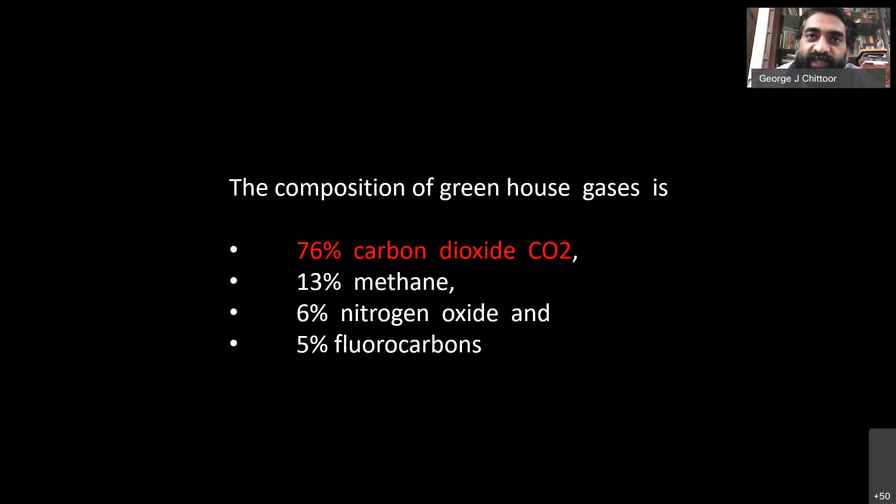We need to know that 76% is carbon dioxide, and researchers show that 8 major sectors contribute to the production of carbon dioxide: power stations, industry processing, transportation fuels, agriculture byproducts, fossil fuels, commercial and other sectors, land use and biomass burning, and waste disposal and treatment. Of these, industry processing is what the building industry uses more, and 80% of industry processing emissions are contributed by the building industry.

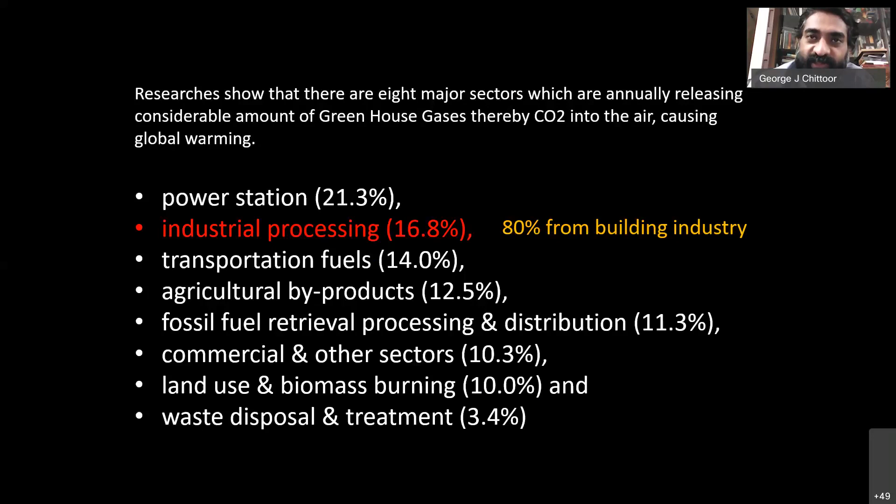So these are certain terms associated with sustainability that often surface when you speak about it. It means your aim is to have less embodied carbon. What is embodied carbon? Embodied carbon is the carbon footprint of a material during production—how much carbon it has emitted during production. That is the measurement we take when saying embodied carbon.

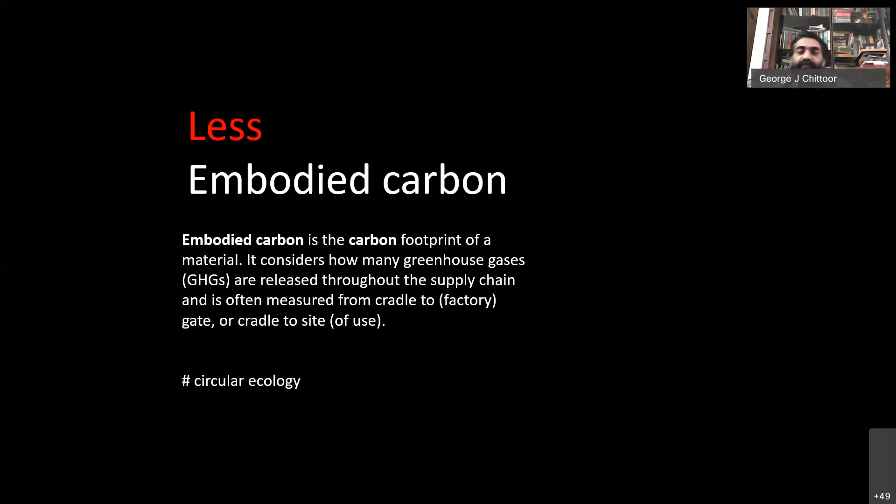The other term is embodied energy, which is an easier term—it is the sum of energy required to produce all the goods and services. This is a kind of chart where you compute the embodied energy in any material. First, you take the raw material: how it is manufactured, how transportation is taken into account, where the raw material is mined, how it is brought to the industry, and what processes make it product-ready. That is how the energy is computed.

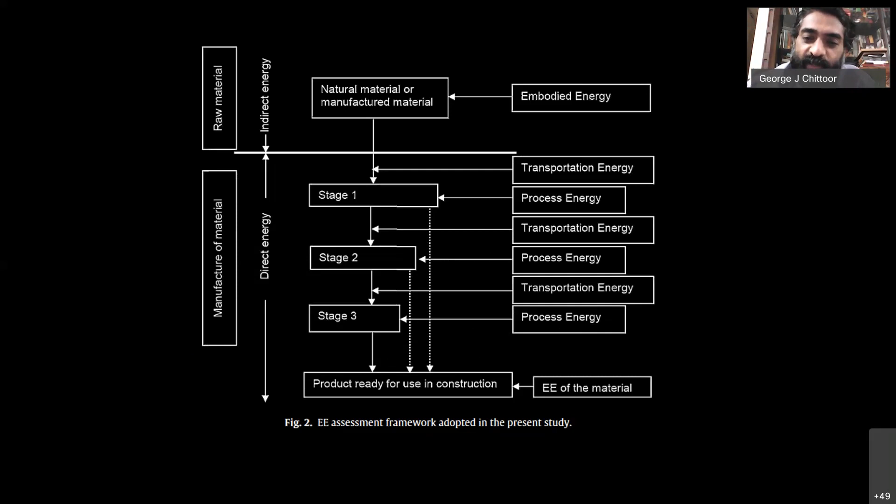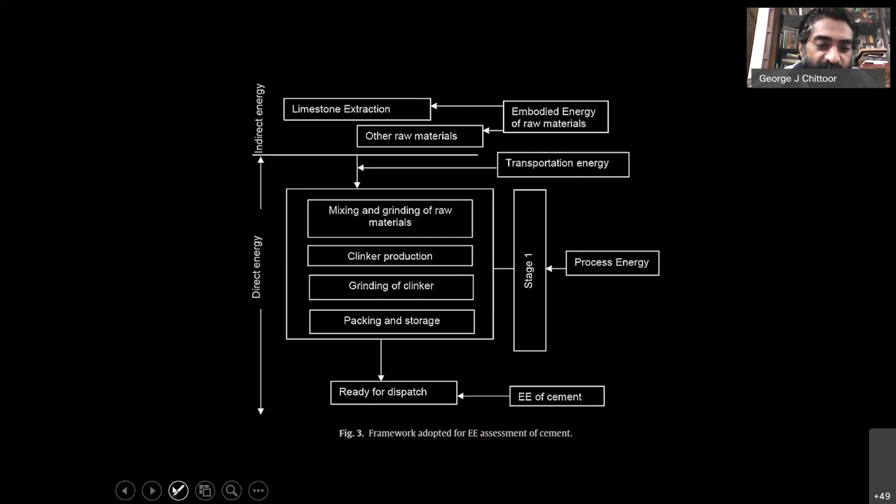In the case of cement, this is a trial chart where the limestone is extracted. The embodied energy needed for extraction, for transportation to the place where it will be mixed, clinker production, grinding, packaging and storage, and readying for dispatch—this entire process is how embodied energy is calculated.

These are some embodied energy standards found in the Indian engineering manual. They've practically identified most of the materials, but this is a general term—not conclusive or standard, because from place to place the embodied energy for brick production in Bangalore or Karnataka is not the same as in Kerala. Each context changes this calculation, but we can use this for general purposes of evaluating a construction technique.

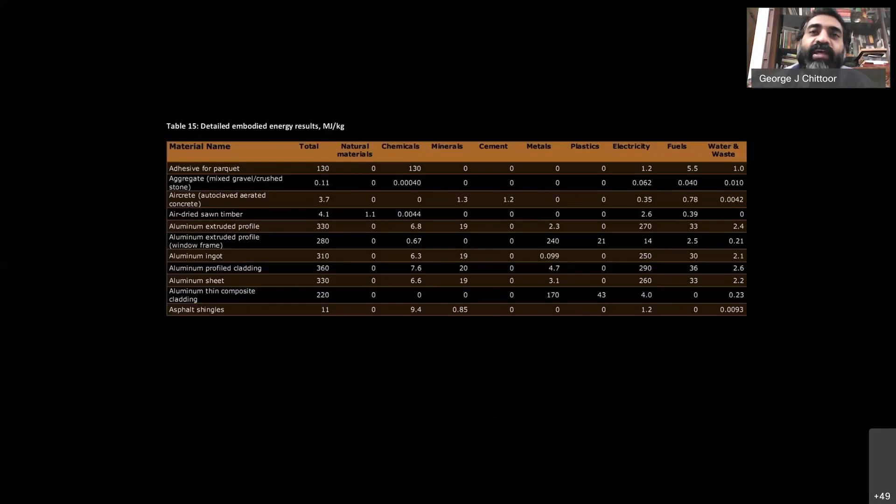So that was energy in the production of building materials. Now you need to think about less waste.

Every building has a life cycle assessment. Every building in its entirety takes up resources in the production to the end, while after a certain life period it needs to be demolished. So this life cycle assessment is an environmental impact computation, a measure of the environmental impact that a building takes up.

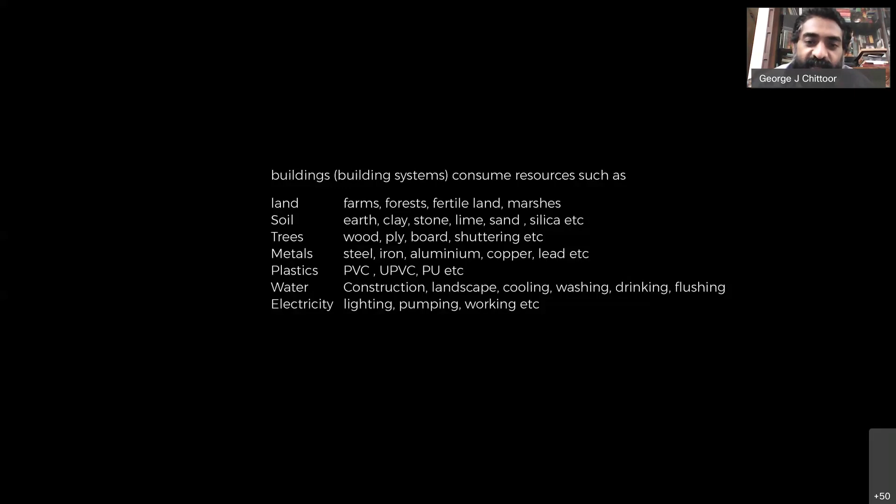Now buildings also generate waste. Site waste is something that occurs during site clearance, the initiating of the project, where trees are cut, vegetation removed, and soil excavated.

Then during the course of construction, there is waste generated - metal boxes, broken bricks, shuttering oils, etc. Sewage is produced during the operation of the building. Organic waste is generated during the life cycle of a project - vegetables, fruits, kitchen waste.

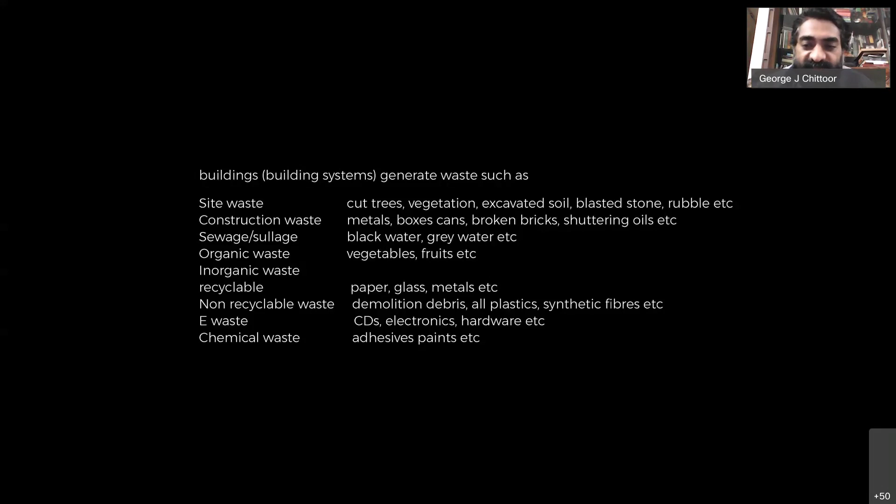There is inorganic waste which can be recyclable and non-recyclable. Recyclable contains paper, glass, metals. Non-recyclable includes demolition debris, plastics, synthetic fibers, etc. Then during the production period, there's e-waste - CDs, electronics, hardware - and chemical waste - adhesives, paints, etc. So these are the kinds of waste generated during the life cycle of a project.

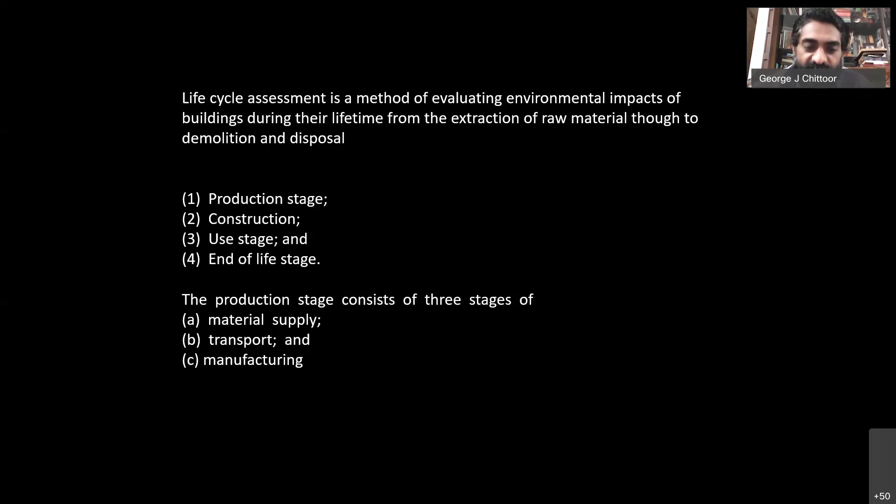So next, I'm just running through - this is the science part of the subject. Next I'll go through the general components in a building.

So the foundation - how can you be sustainable in foundation? Foundation is where we don't speak too much about sustainability because we need to be sure that our building is safe. So we don't generally compromise or experiment too much there, but we speak about sustainability when I have to decide between low-rise and high-rise buildings.

When somebody is deciding to construct and both options are workable for them, I generally advise going in for the low-rise high-density project. Why? Because it takes a lesser amount of steel and concrete to build up the foundations than a high-rise building. The same amount of square feet can be achieved with low-rise high-density. So we generally advise for a low-rise building because it consumes less materials. That is how we generally aim to be sustainable in the foundation part.

I've seen Laurie Baker try out with bamboo and such, but I'm not courageous or adventurous enough to try out those techniques because most of his knowledge came from empirical methods. Those were not standard, recommendable theory at that point in time. But he worked it out, and now there is a theory part of it - now there is an authentication.

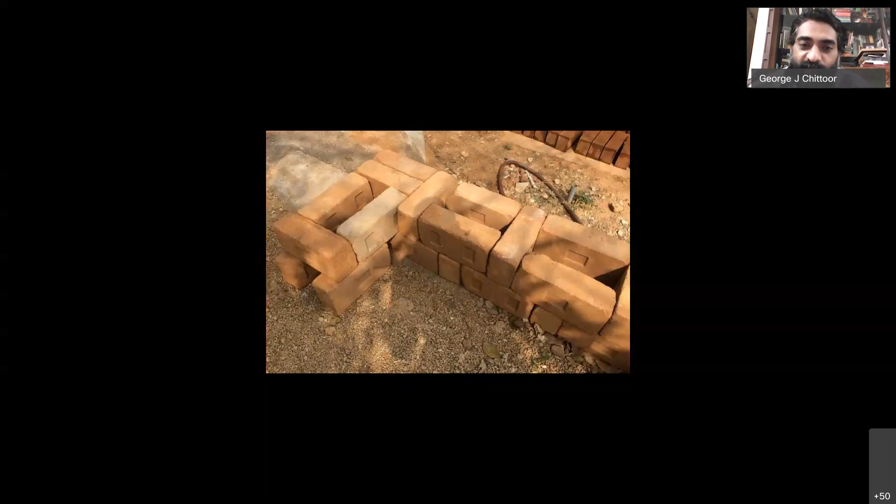So this is brick - there was the English bond, and Laurie Baker introduced the rat trap bond. He was not the person who invented it, but it was in general use in England. This is found to be thermally good and uses fewer bricks. The mortar joint compared to the normal English bond was also less, so thereby you're saving cost from both factors.

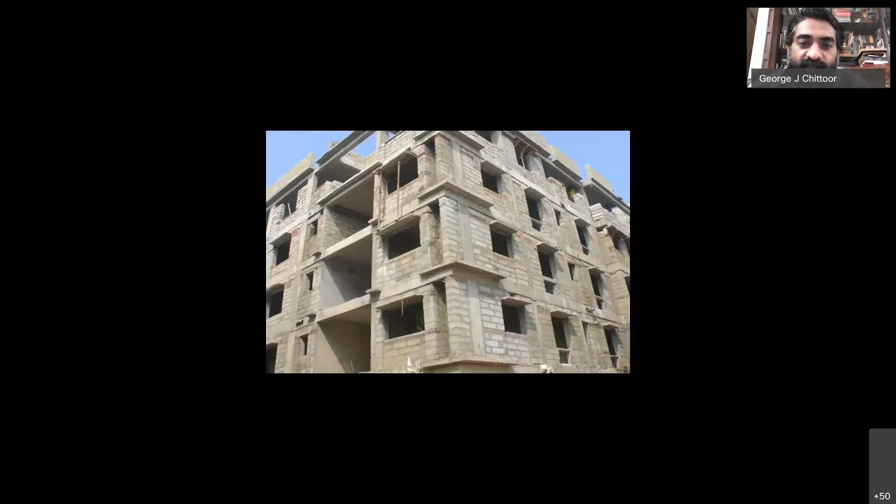Then we have the solid concrete block, the hollow concrete block, the aerated concrete block, the stabilized mud block, the Porotherm bricks, Wienerberger bricks. So all these are building materials for the walling systems.

There wasn't acceptability towards most of these materials. Brick was the known material for a traditional Malayali. I remember it was around 2010 that all these materials started becoming more common. We had difficulty during those periods convincing clients to use these and making it more economical. Now it is certainly the most economical material, but during the initial stages, in the 2010s, it wasn't easy convincing a client to use a concrete block.

At that point of time, brick was not readily available. It was getting costlier and costlier, but it was available. Even now, it is available at a higher cost.

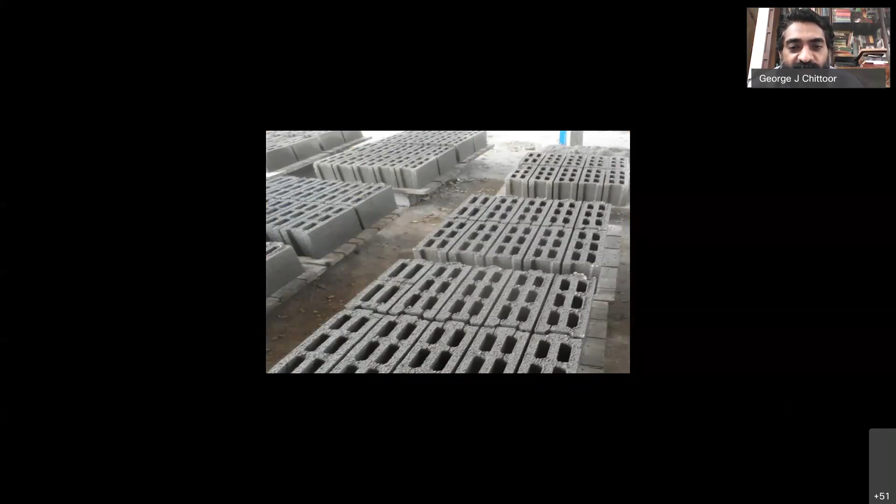Solid block, hollow block, aerated concrete block and stabilized mud are not load bearing. That is why we'll have to do a column frame structure to incorporate this material. But most apartments are now incorporating these materials.

I really like AAC blocks because they are very lightweight and can be constructed very fast. If you have a large area per floor, at least four layers of aerated block can be built up in a day for a wide area, compared to brick or any other material.

So these are places where project management plays a heavy role. In project management, you identify what is consuming more resources, in terms of material usage and in terms of time usage. So the easiest parameter to assess all these management techniques is to see whether it is costly or not, is to convert it into rupees, and you can see that when it is coming out more economical, it means it is consuming less energy.

It is not a conclusive theory, but it is a general theory which I always use. Because right now, concrete may be cheap, but later on, looking from the material resource point of view, it will get diminished. So we need to take care in the usage of material so that we are using it for the later purpose. From that point, we need to take care.

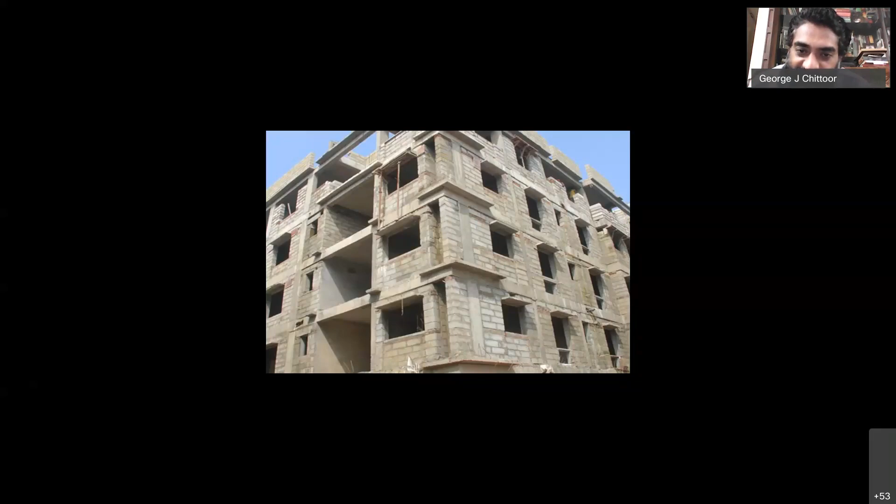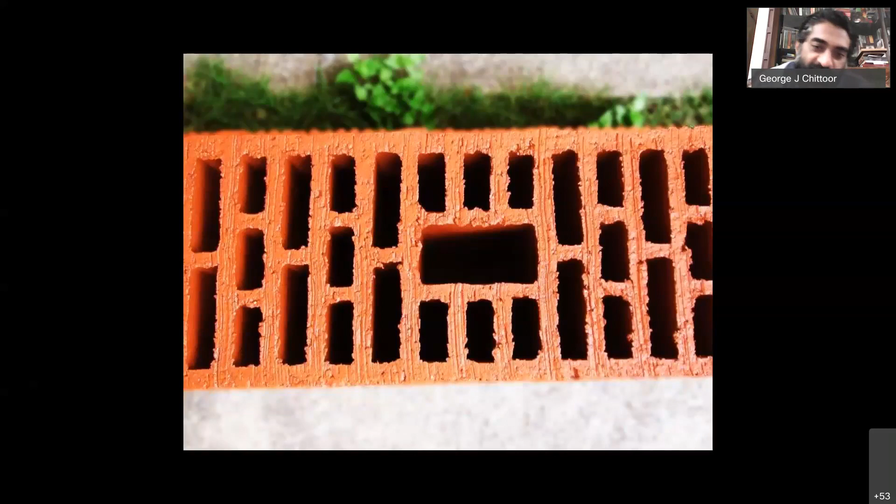This is Porotherm bricks. It is also widely used. We started using this. The good thing about this patented technology is it was started by a German Wienerberger company, and there are many companies coming up with similar materials from Bangalore and all. There are many companies producing these Porotherm bricks, but the technology with Wienerberger is that the fins in between are so thin, it seems they've got some kind of technology that produces thin clay layers in between.

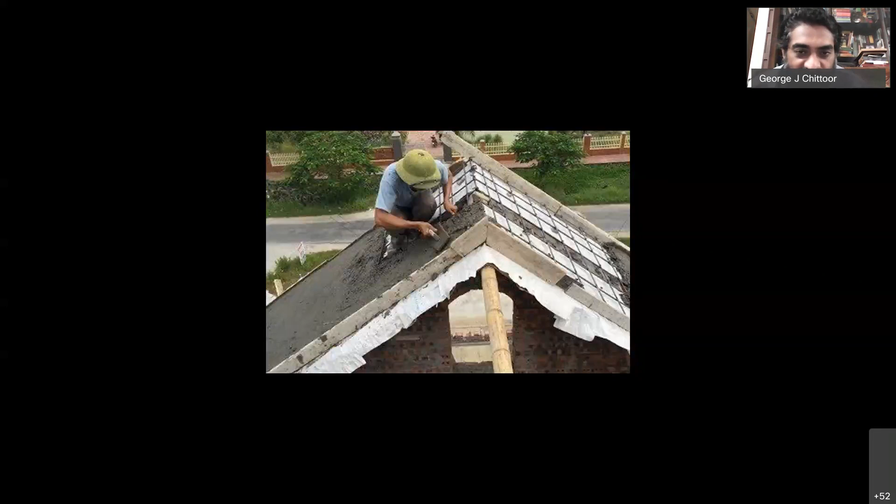So when it comes to roof systems, there is traditional concrete, then we have filler slabs with clay pots, and there are Mangalore tiles also being used. So these are now common technologies, but the usage requires skilled labor while doing all these technologies.

When it comes to normal concrete, it can be easily done, and if there is any flaw, it can be easily rectified. But when it comes to filler slabs and these alternate, unconventional methodologies, the one constraint is it cannot be rectified, and the usage of manpower is too high, which adds a lot of cost and time. So in terms of material resources, it is less consuming, but when it comes to labor, it is more consuming. That is why it is not popular.

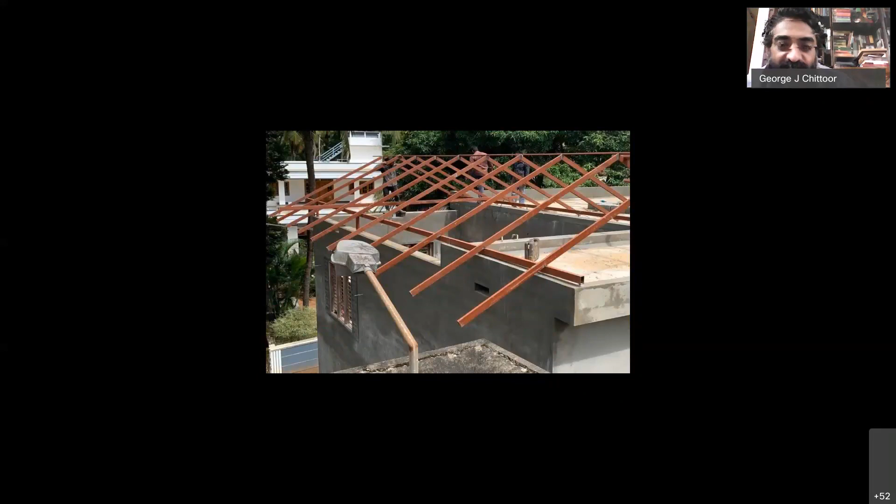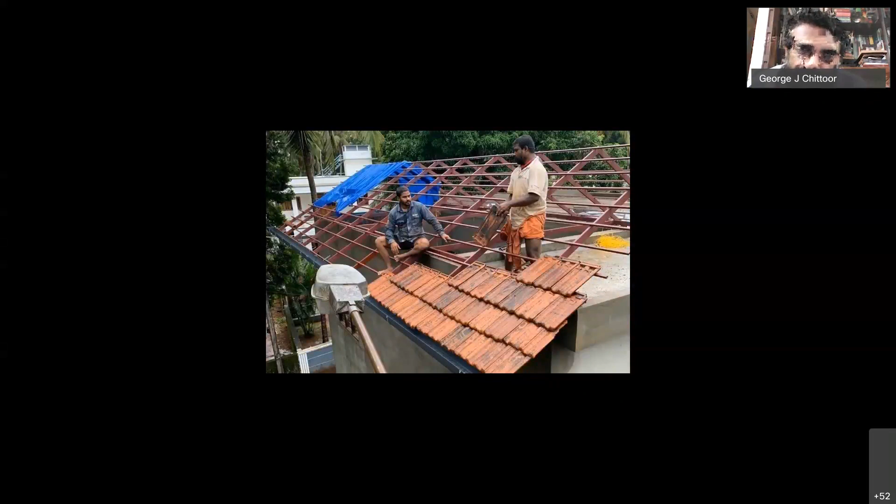And this is another variant which is being common nowadays. Instead of concreting, you do the truss work and then lay it with Mangalore tiles. On the underside, you use either PVC or there are many materials like cement fiber board or natural wood to have that elitist feeling.

So all these construction methods, in terms of eco-friendliness, are much more eco-friendly. It is a bit costlier than concrete, the whole package. And if you use cement fiber boards or PVC materials, it is even then slightly more expensive than concrete. In terms of material resources, it's saving a lot. And the whole package of building a project would mean less weight on the foundations, and thereby you'll be saving the foundation cost also. So as a package, this would work out economically.

So in the line of sustainability, there's the energy component used by a building, and that relates to human comfort. When it comes to human comfort, there are two ways: passive or active. Passive means natural ventilation or natural lighting, while active means artificial lighting or artificial ventilation, which uses energy. So this is where your application of wisdom comes in, deciding how much of the project should be naturally ventilated versus dependent on energy. This is where sustainability questions and parameters come into picture.

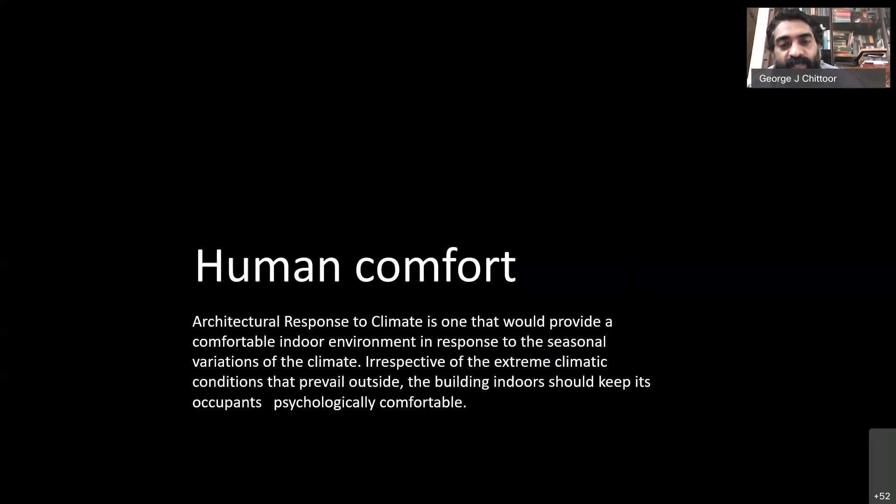For energy conservation, there is building automation, which is becoming more and more popular these days. We've adopted energy automation in most of our recent projects, and it helps a lot. It helps us identify when a water meter is running, indicating a water leakage somewhere. When energy consumption is more than normal, we see there's something wrong in the wiring, and we're able to identify issues in some appliance. This kind of building automation, I would seriously recommend if you're a hardcore sustainable person, and it's becoming very economical too.

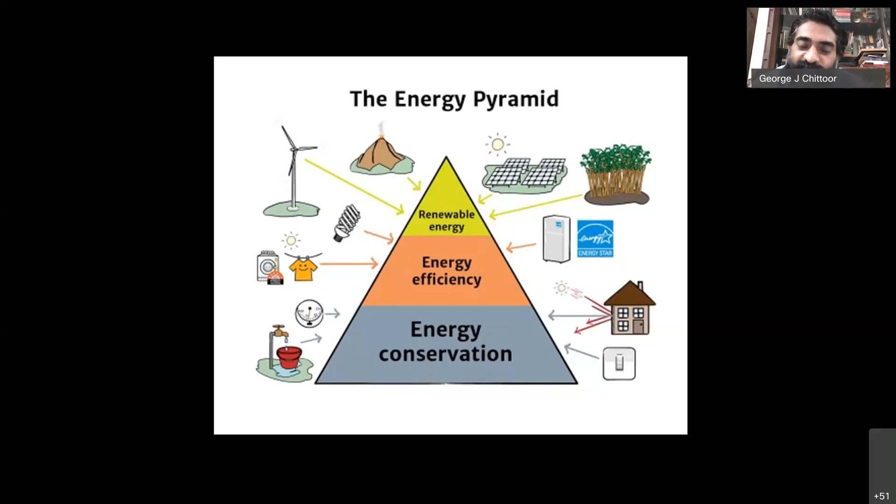We've got projects where the client waters the landscape from Dubai, just using an app to say water from 9 to 10, a drip irrigation kind of system. These technologies help the project stay lively, so whenever he comes home, it's always green with a green landscape. This kind of energy efficiency can be implemented. The whole agenda is to reduce energy as much as possible.

Then we have net zero energy buildings. A net zero energy building is completely off grid, not dependent on energy resources given by the government. There are many terminologies like zero energy, net zero, or neutral zero, but basically it all means being off grid. A completely off grid building means even the waste is managed within the project itself, not given to the state or municipal drainage.

Nowadays, most clients are aware of these terminologies, and they come to us saying let's try out this off-grid project, let's see how much it's going to cost and if it's workable. There are many rating systems in the country which inform us of what is less and what is more.

Three such agencies in India are Adarsh, IGBC, and BEE. IGBC was the first one that came about, initiated by the Confederation of Indian Industries. Later came Adarsh, and BEE is the recent one. Adarsh stands for the Association of Development and Research in Sustainable Habitats. IGBC is the Indian Green Building Council. BEE stands for the Bureau of Energy Efficiency. These are the three agencies that give rating systems.

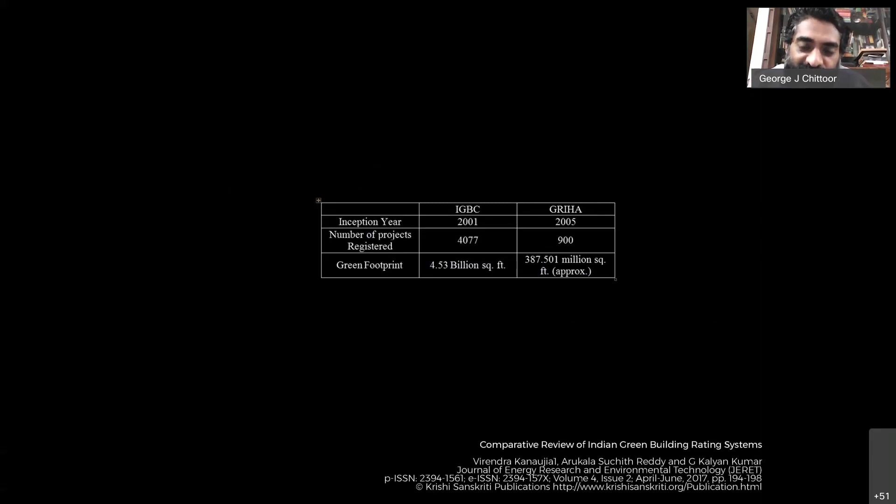So these are the various rating methods available in India. All of them are more or less the same. ECBC is a code, while GRIHA and LEED are generally similar. GRIHA is a bit more strict, I would say, but it's always better to adopt the GRIHA system because it's a more Indianized version. IGBC was started in 2001, GRIHA was started in 2005, and there's a system of 100 points that each rating system uses. If you see, GRIHA is a little bit more strict on each parameter.

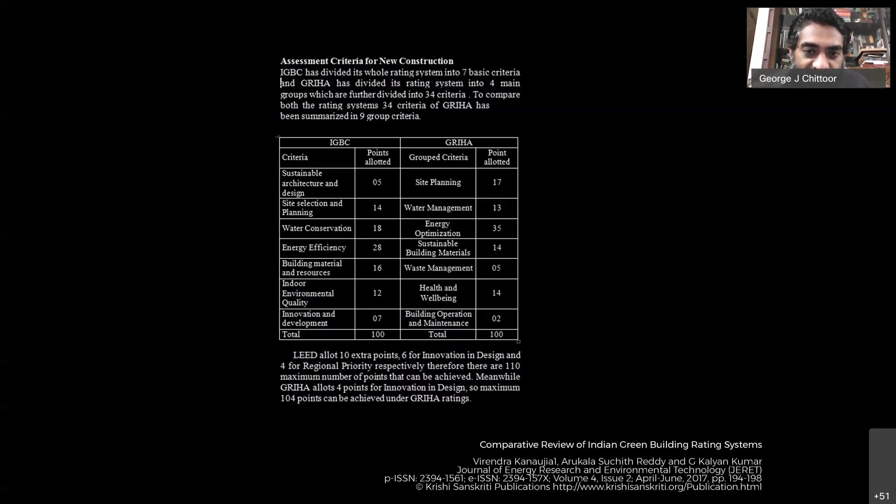And from the project management point of view, GRIHA is the rating system that gives marks for the project management of the project also. So from that point of view also, GRIHA is better. I would recommend implementing GRIHA for the wider purpose.

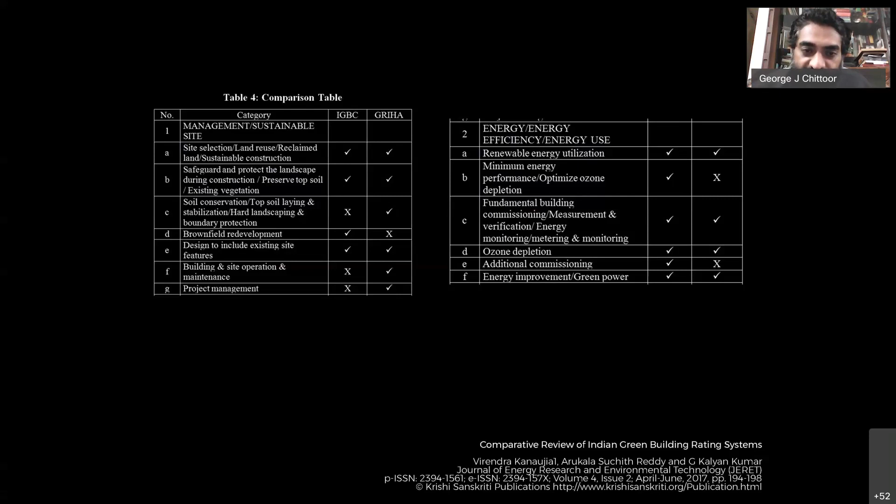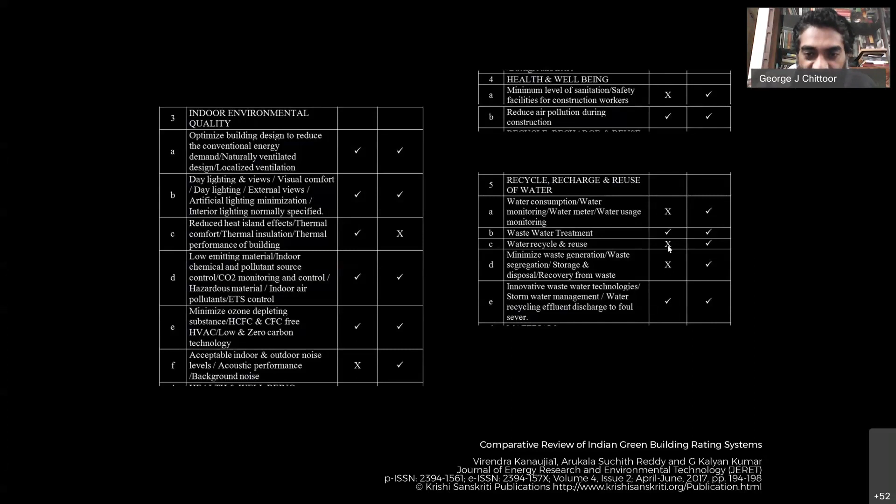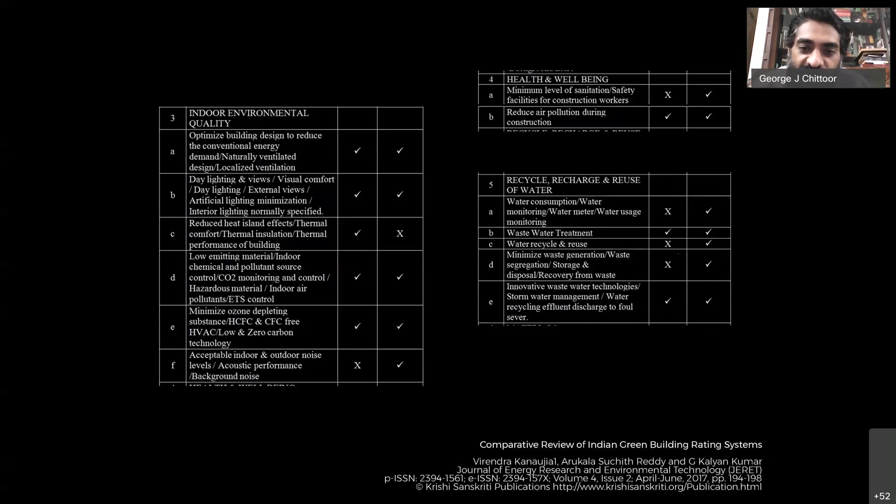So even if the building is to be rated or not, I would say having a kind of checklist in all your projects for a GRIHA rating can make a building more sustainable. The process of getting it rated might be a bit tough, but even without the rating certification, you can have all your projects done in such a manner.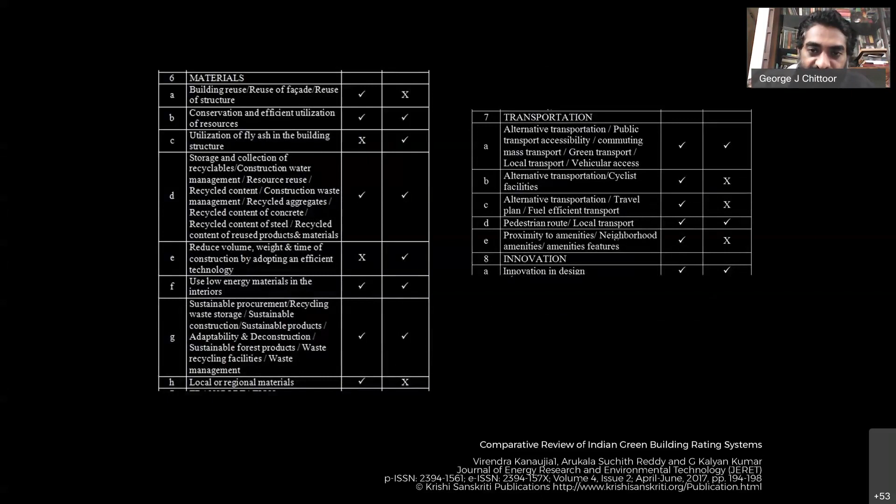So what would be the key takeaway in this second chapter is the wise usage of all the resources and techniques. This is mostly science. Why is it called science? Because it is more of quantities. There is a lot of quantification of activities, quantification of materials, and quantification of the consequences. There is a weighing of each and every decision; each decision has a weightage to it. So this is where project management would really play a role in deciding which is good and which is bad.

So next is on the local or the global. This is more of aesthetics and visual imagery when it comes to whether we should be local or global. This has been from time immemorial, man's aspiration for progress or a progressive image for every person. So vernacular, the original architecture, if you see the primitive architecture, it is always a rectangular box and a sloping roof on top of it throughout the world.

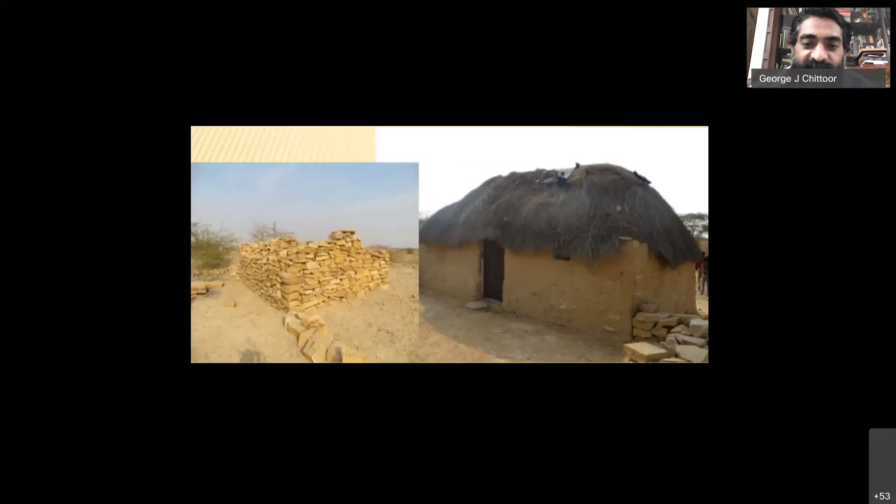So this is a roof in Rajasthan, vernacular architecture in Rajasthan. Again in Rajasthan, you can see how slowly the color is getting added on, how slowly art is getting onto it. This is in Tamil Nadu.

This is one from the documentation of most of the houses. You can see on the left side of the panel that most of the buildings have sloping roofs, and how during a period it was being converted with the same visual imagery, the building materials were getting changed. But even then, the same typology was there.

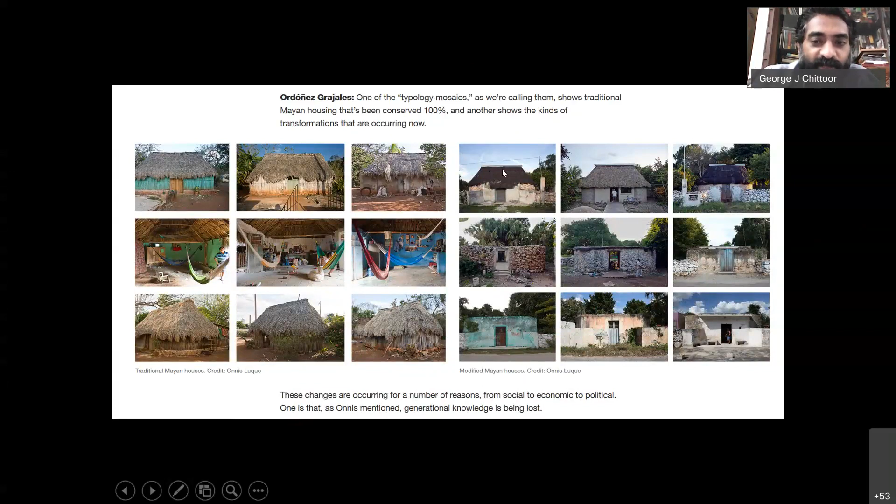Then as man progressed, man started to seek out other imageries of being distinguished, or we had an aspiration for being different from other people or other parts of society. This is again the next generation from the primitive architecture, the next generation that took along in traditional architecture.